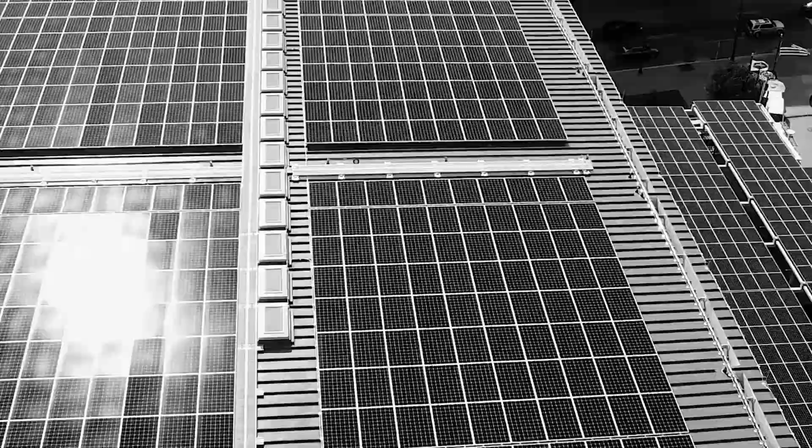How is it going? Welcome to our infographic video done for our project 1A of our energy and architecture module, taught by our wonderful lecturers Mr. Bruce and Dr. City. For this project, we were required to do a low energy building analysis of a chosen low energy building, identifying specific energy efficient strategies with their implementation in the chosen building. For this assignment, we chose to focus on United Therapeutics Unisphere.

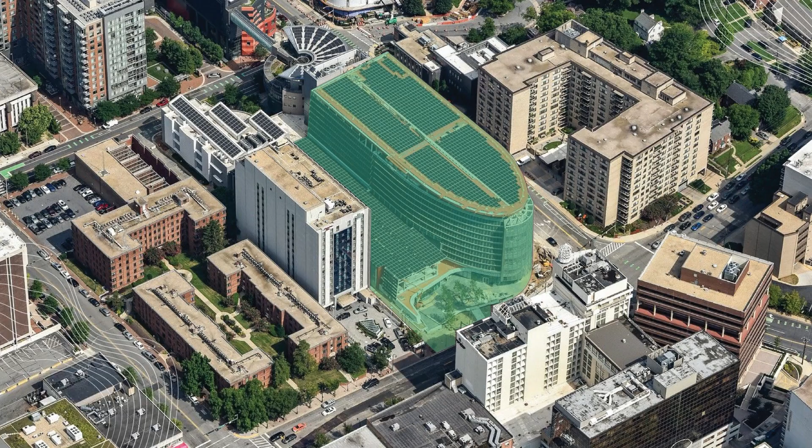When United Therapeutics CEO Martine Rothblatt announced a net zero energy mandate across the company, she challenged the project team to make energy performance the primary metric in every design decision. She had two requirements in planning for the Unisphere. One was a regulation pool in the lobby, and the second one was having net zero energy. The result of these mandates and these requirements is the Unisphere, which is the largest commercial net zero building in the US, and it generates more renewable energy than it consumes in a year since its opening in 2018.

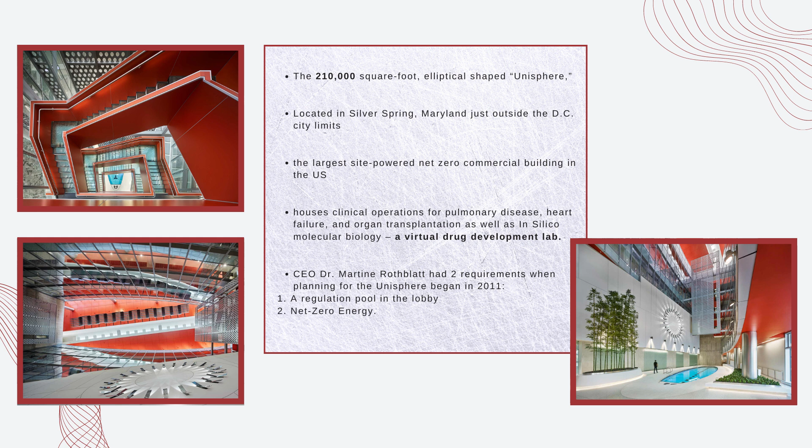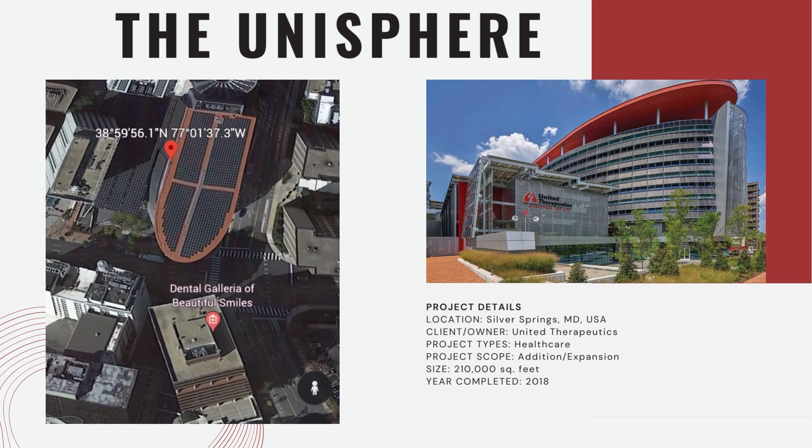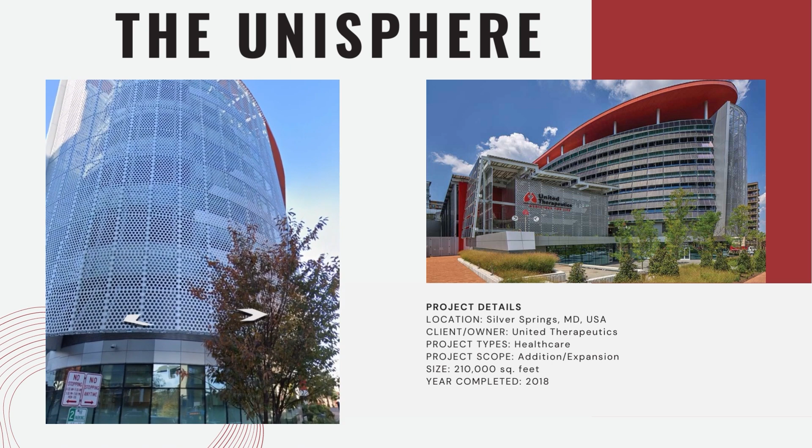The United Therapeutics Unisphere is the largest net zero energy commercial building in the United States at 210,000 square feet. Opened in September 2018 as an extension of part of the United Therapeutics existing campus, the building houses offices and conference spaces. The project is prominently located along a major roadway in Silver Spring, a suburb of Washington, D.C. The site is surrounded by mid-rise buildings constructed to the vertical zoning limit, which create many challenges for the design of a net zero energy project that exclusively utilizes solar panels to generate renewable energy.

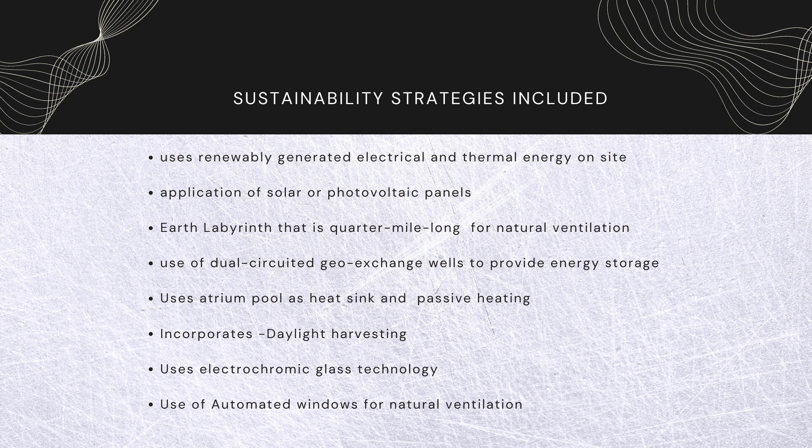United Therapeutics believes that the reduction of the carbon footprint of the community benefits us all. As such, the project team embodies this value by pushing the cutting edge of building technology. The culmination of this technology will be a net zero site. This means that the site will have no carbon footprint of operation because the amount of electrical and thermal energy used in operation will be renewable, generated on site. This smart building takes advantage of multiple sustainability strategies, which include the following.

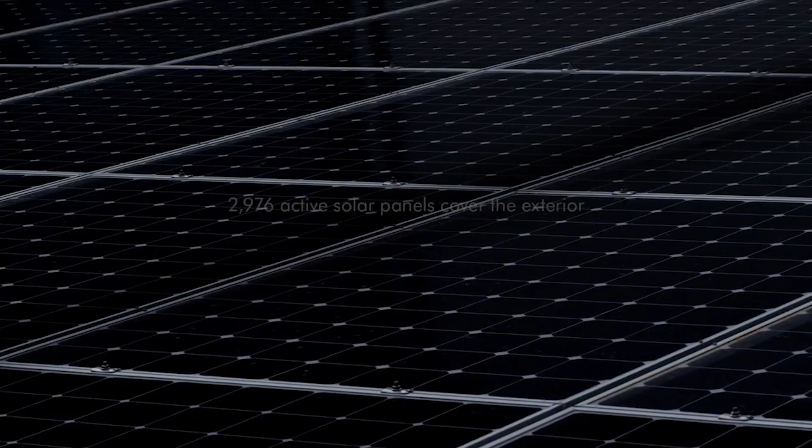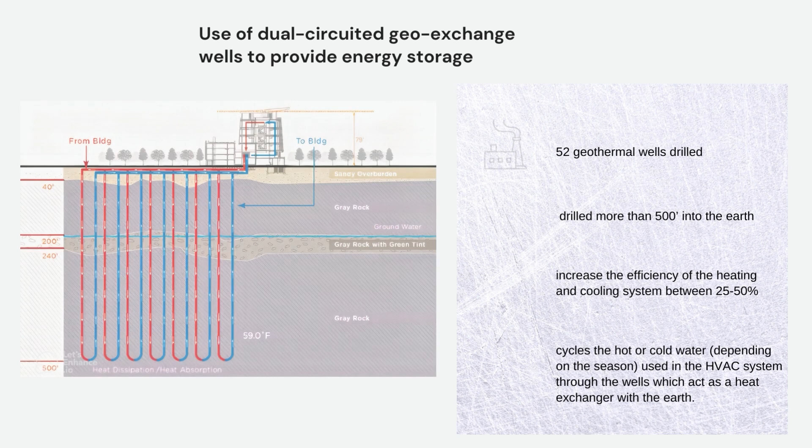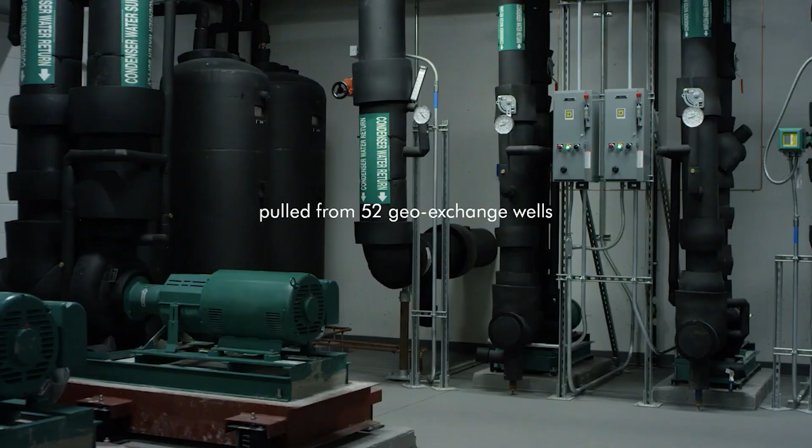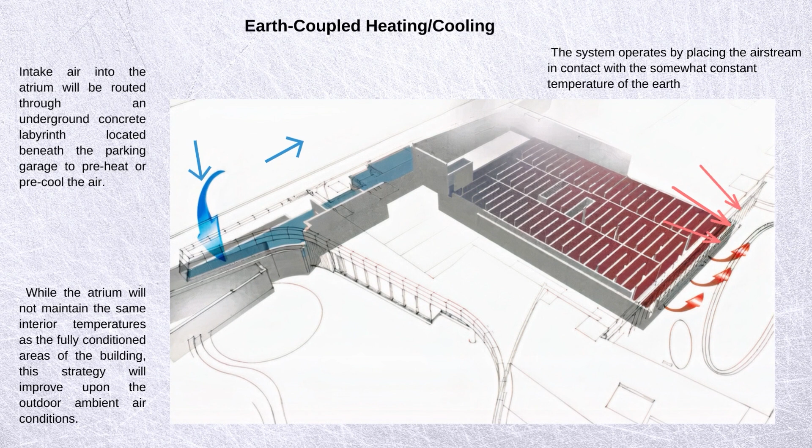Daylight harvesting allows dimming of the artificial lighting system when adequate sunlight is available. The office area windows use electrochromic glass technology that changes tint level based on season, location of the sun, and cloud coverage. Operable windows and panels allow the building to naturally ventilate, providing a completely passive ventilation mode between certain temperatures. Excess power is sent back to the utility grid during peak production times, and the utility grid supplies this power back at night and at off-peak times.

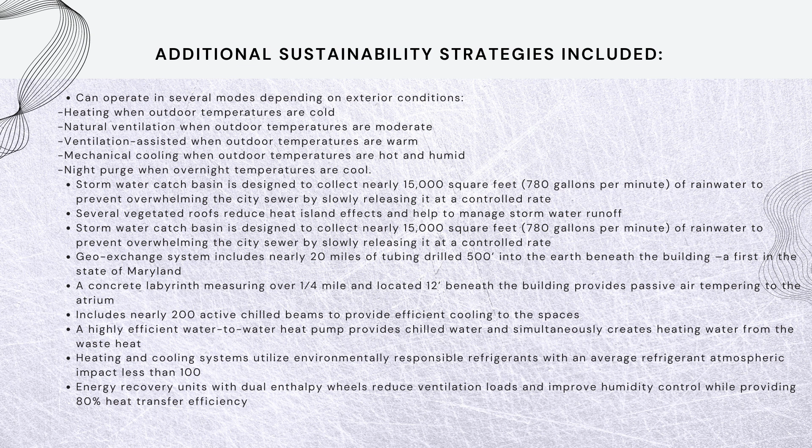There are some additional sustainable design strategies and features which are employed by Unisphere, and these include the different operating modes such as the heating, natural ventilation, ventilation assisted, mechanical cooling, and the night flush. There is also a stormwater catch basin that's designed to collect nearly 15,000 square feet or 780 gallons per minute of rainwater that prevents overwhelming the city sewer by slowly releasing it at a controlled rate. There are also several vegetated roofs that reduce the heat island effects and help to manage the stormwater runoff.

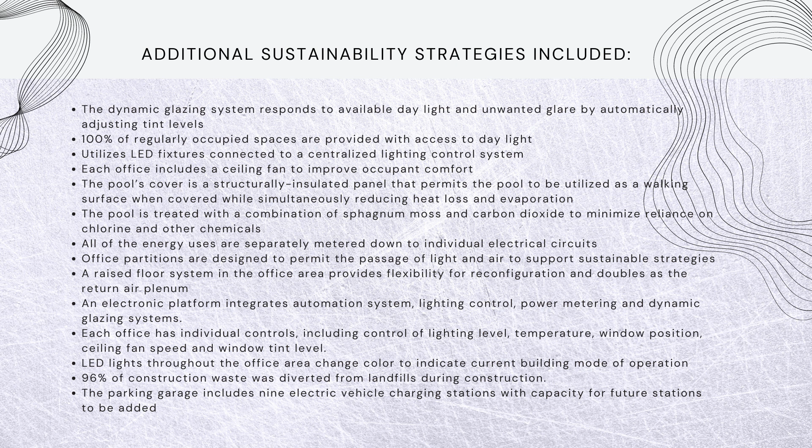And there are also 200 active chilled beams that provide efficient cooling to the spaces. A highly efficient water-to-water heat pump also provides chilled water and simultaneously creates heating water from the waste heat. And there's also heating and cooling systems that utilize environmentally responsible refrigerants with an average refrigerant atmospheric impact of less than 100. With all of these additional sustainable features, there are two other features which we would like to highlight and spotlight from the building. One is the plug load management, and the second one is the centralized building automation system.

The plug load management is often the most difficult energy use point to control in a building, since they are not traditionally designed into the project, but instead are controlled by the user post-occupancy. However, the Unisphere has employed some strategies and policies which help to lower the plug load and help keep the building as sustainable as possible.

They require the purchase of Energy Star rated equipment or OLED televisions, which help reduce energy use. Also, the IT department has enacted policies that help to force computers into hibernation mode during unoccupied periods, and they also install timers or controllable circuits that de-energize power, as well as all computer workstations being docked with laptops and a separate monitor, which reduce energy by a half compared to traditional CPUs.

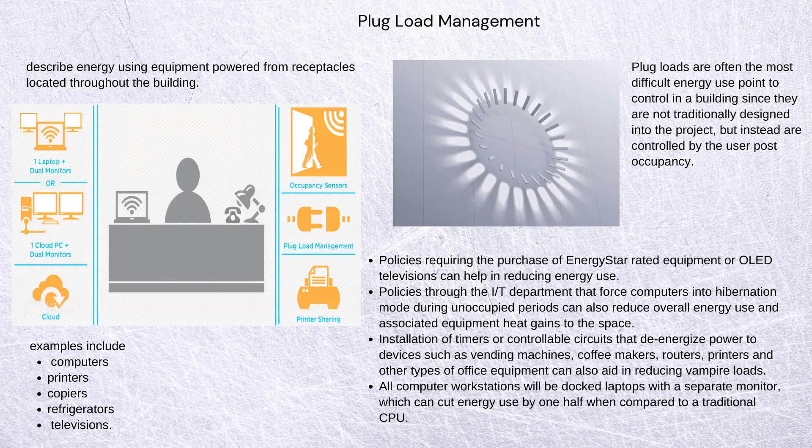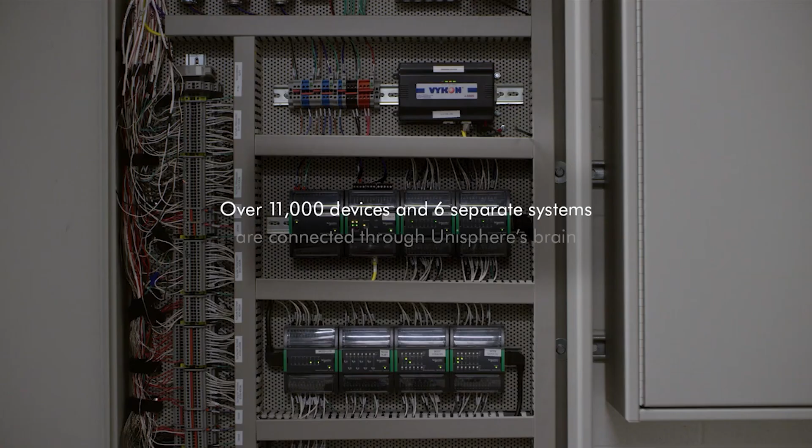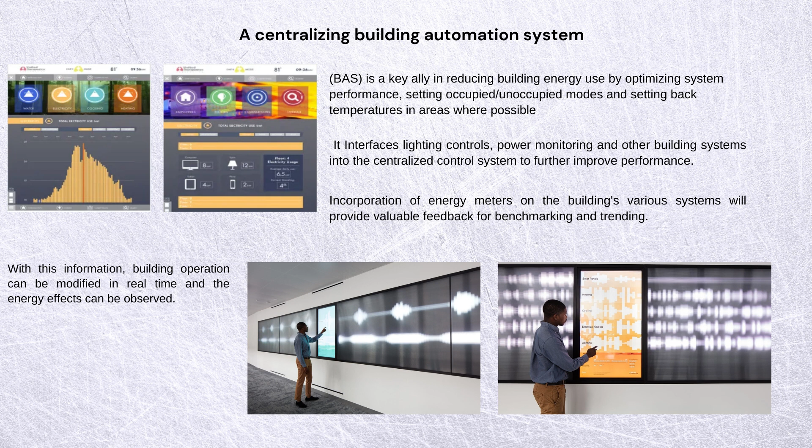As for the central building automation system, this is a key ally in reducing the building energy use by optimizing the system performance, setting occupied or unoccupied modes, and setting back temperatures in areas where possible. It interfaces lighting controls, power monitoring, and other building systems into the central control system to further improve performance. And the incorporation of energy meters onto the building's various systems will provide valuable feedback for benchmarking and trending.

And all of this valuable feedback can be seen and viewed from the central hub, which monitors the building's energy use and generation in real time. This central hub is called the Energy Dial and the Energy Dashboard, and they use real-time data to showcase the ebb and flow of the building's energy.

The sculpture, called the Energy Dial, shines light outward whenever the building is producing a solar energy surplus, and shines light inward if it's using more energy than is being produced. Its form, scale, and behavior encourages a symbiotic relationship between the occupant and building as people understand its story immediately.

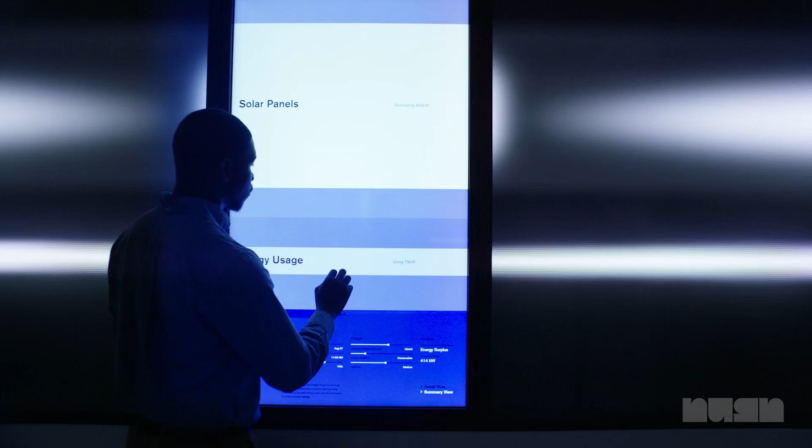The Energy Dashboard, on the other hand, helps to view all of the different systems working in the building, and people can use it to view all the real-time data, such as the energy being produced, the amount of energy being used, the amount of energy that's a deficit, what mode the building is in, as well as the amount of energy that's stored and the thermal controls of the whole building.

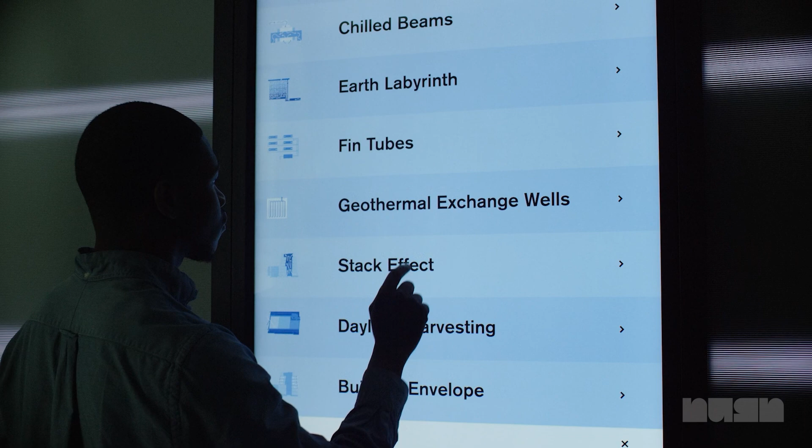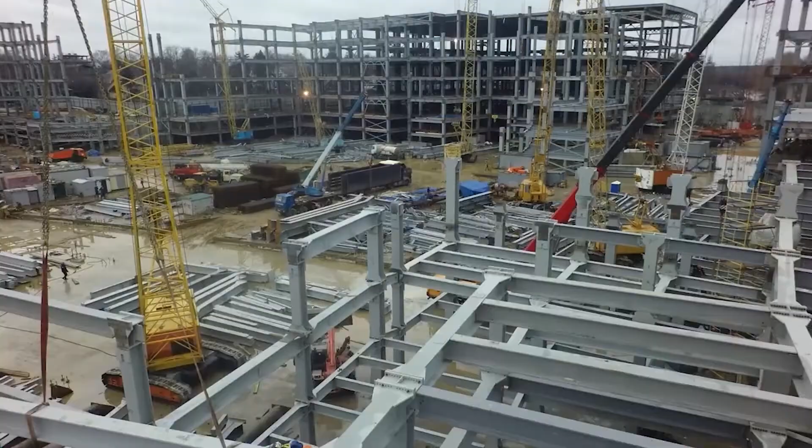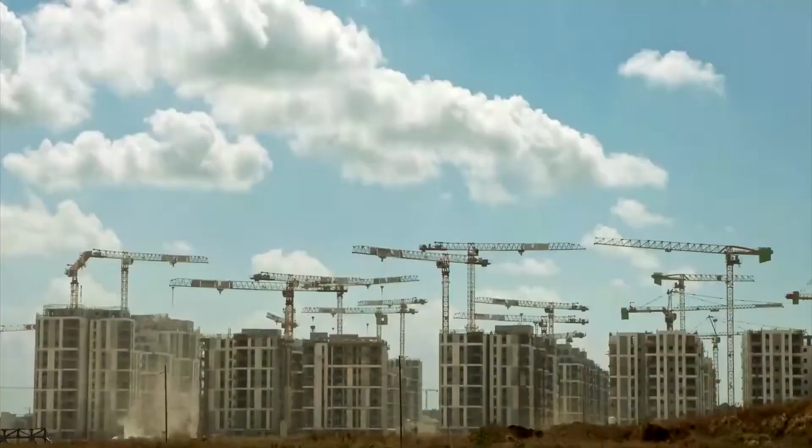Having seen all of these wonderful building and sustainable technologies being used in the Unisphere, one has to ask if indeed all of these technologies are adaptable and can be used in the developing world. Despite having numerous advantages, clean building technologies are still very slow to be picked up in the developing world. However, as climate change becomes more prevalent and its effects more widespread, both developers and occupants of buildings are becoming more aware of green building technologies and are pushing for new buildings to be more sustainable.

For example, in Kenya, sustainable building practices were never thought of much until the success of the Garden City mixed-use development project. This project, which consists of a retail mall, residential apartments, leisure and office spaces, was announced in 2007 and completed in 2014. In 2015, it was announced that the Garden City Mall had received the LEED Gold certification, implementing solutions which were aimed at achieving high performance in site development, material selection, energy efficiency, water savings, and indoor environmental quality, making it the first building in East and Central Africa to acquire this certification.

And key to this was the implementation of a green by design approach, which incorporated environmental measures under the 7 LEED sustainability principles. Key to this was the roof of the shopping mall being turned into Africa's largest solar photovoltaic carport, which generated 1,200 megawatt hours of electricity a year.

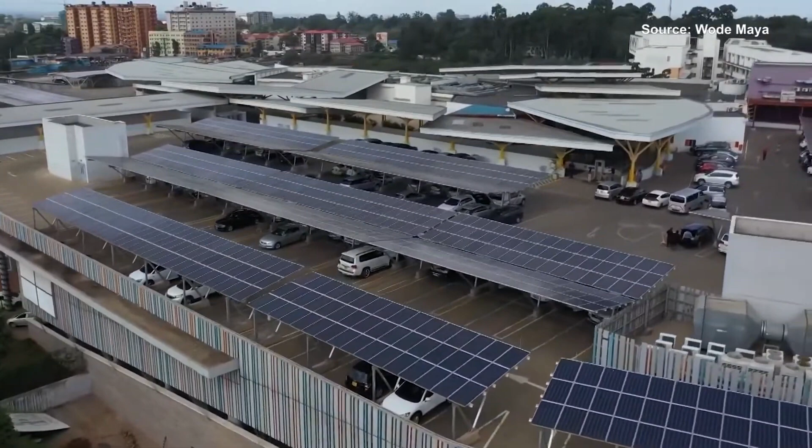The mall also incorporates water recycling and harvesting systems that significantly reduce potable water demand, which is of vital importance around Nairobi, where the regional environmental priority is water security. Some 50% of the building materials comprise recycled content, with 70% of the construction materials sourced domestically, providing a lot of significant benefits to the Kenyan economy.

And now we have come to the end of this video showing our low energy building analysis for the Unisphere.